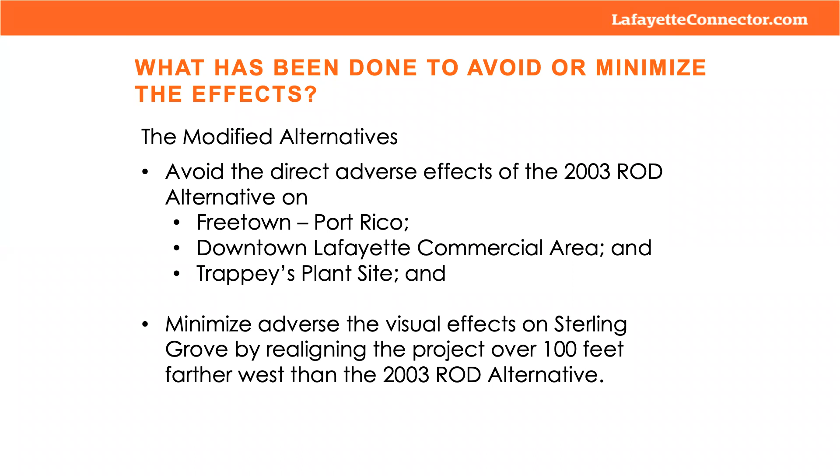We end up in one of two places. Either we have an adverse effect, which is not the end of the world—it doesn't mean it's a fatal flaw, it just means there's an adverse effect. There's lots of trade-offs whenever you're going to do a one billion dollar improvement to a community. And if we go there, then we just deal with it.

We develop minimization and mitigation tactics. Or we end up with a finding of no adverse effect, which doesn't mean there's no effect of the entire project—that just means there's no adverse effect of the project specifically on historic properties. You all know how this works.

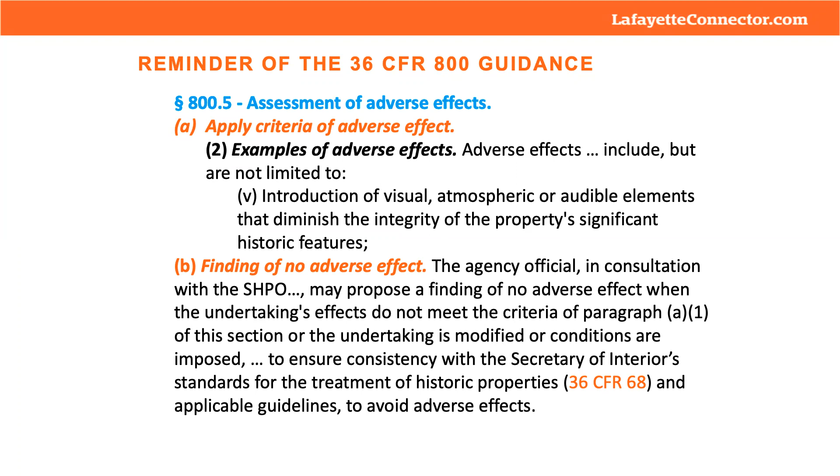And then if there is an effect, we capture that. We come to agreement among ourselves about what the mitigation is going to be, and that's agreed to in an MOA, which is then a binding legal agreement that is essentially part of the record of decision and the federal approval of the project.

So you'll recall there's essentially two designs, which are almost the exact same design—one using roundabouts and one using signals for the central throughway corridor. There are some differences in the extent to which roads connect; you can see some of these connecting roads, second, third, for example, are a little bit longer in one than the other.

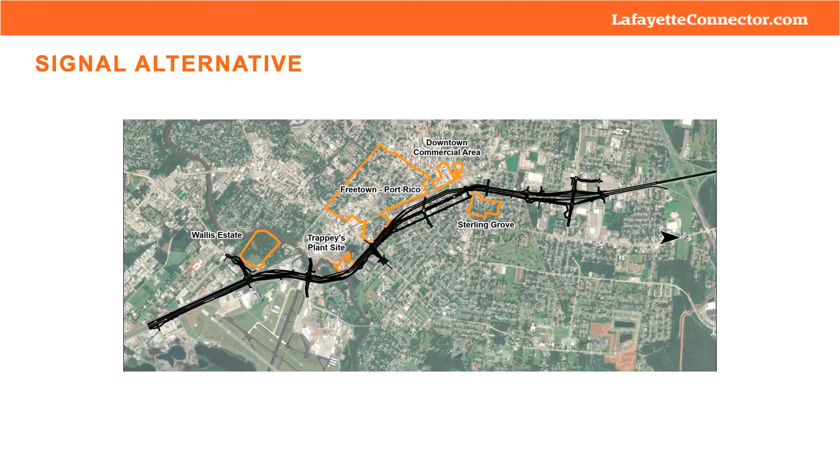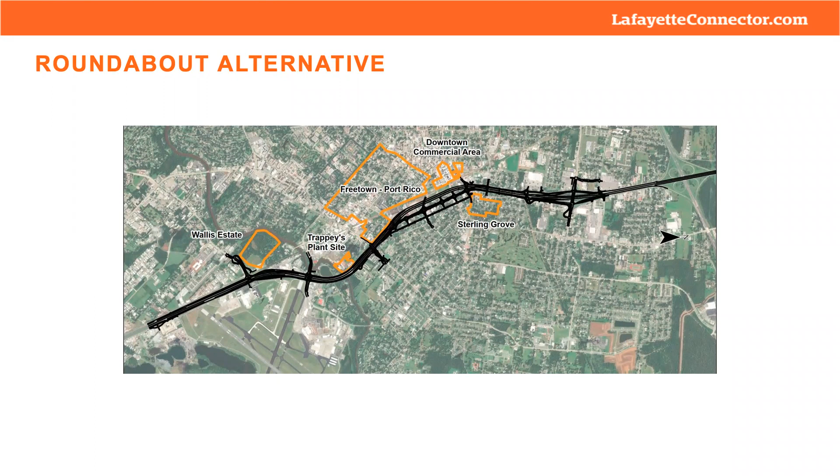But those improvements are mostly just restriping to make sure that, for example, while we connect to a slightly different road, the stripes are all aligned, and maybe some pavement improvement, but a lot of that within the road itself.

So we're now going to walk through that corridor, north to south, and look at some of those areas we've been thinking about. You'll recall this map from last time—it's showing the roundabout alternative and Sterling Grove.

I will not belabor this legend over and over again, but I'll hit it on this first one. So the purple and the peach, maybe beige-peach color, those are both the edges of the Sterling Grove Historic District. One is the edge from the nomination and the approved district, and the purple edge is what it could be, because we think those are related and contributing historic resources. But regardless, the red line is where the right-of-way used to be.

And after a good bit of work, we managed to move it over to where the yellow line is now, about 100 feet away from where it used to be, and much further away from the Sterling Grove Historic District. So we are no longer acquiring any property from the Historic District.

We're no longer putting a major roadway right in front of St. Genevieve's. We are still doing some slight improvements to Simcoe, but those would be within Simcoe itself—essentially striping and signage to make sure it aligns, but we're not going to be rebuilding around Simcoe. This is the roundabout alternative.

Remember, there were two alternatives. The signal alternative does not require that little improvement to Simcoe, so it is clearly, unarguably nowhere within the district boundaries, not even getting too close to them. So we've clearly managed to get out of it. And with the roundabout alternative, you do see some overlap.

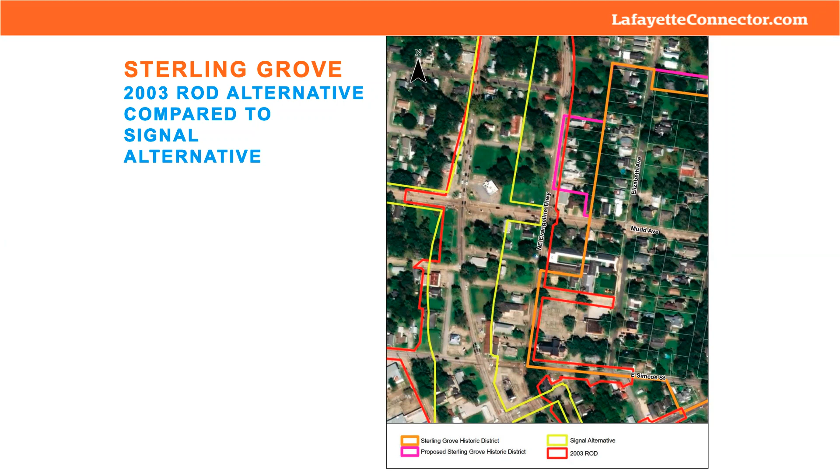And for that matter, if you're a technician, a neighborhood rep, or an advocate, and you think you see an effect here, help the rest of us understand what that effect might be in your mind, because that's what we'd like to hear.

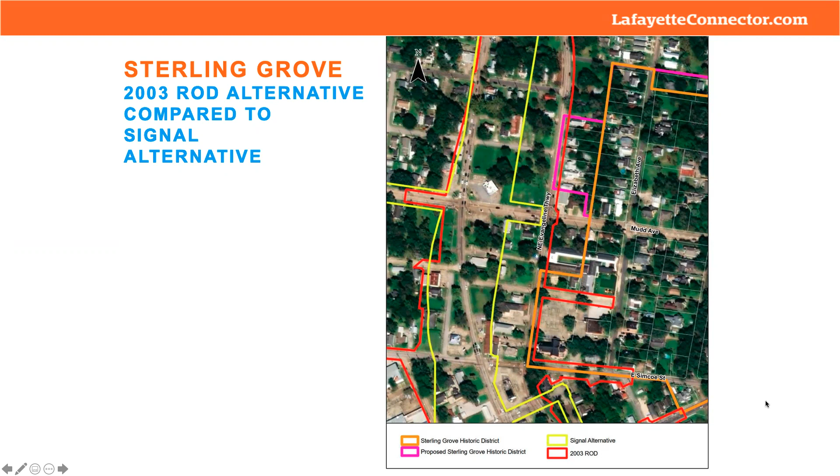Thank you, Sarah. I'm going to move on. We can come back to that. And like I said, we might be able to pull up the road line work and dive into that conversation if you want to revisit it, Brett.

Now we're moving further south, adjacent to the downtown Lafayette Historic Commercial Area. This was when we had the historians in the field identifying potentially eligible properties. They identified a potentially eligible downtown district at the time. Since that time, representatives of the area and local government have advanced a nomination and had it listed on the National Register.

The edges of it are pretty similar to what we had thought when the technicians were out in the field looking about. And regardless, it's a good bit away from the right of way. So you can see the railroad property is in between. The district does include Rosa Parks, the train station, but then there's a good bit of open land, former railroad yard, and some other intervening properties before you'd even get over to the elevated interstate. So a good bit of distance there.

And in a part of it that isn't exactly looking in that direction, right? So it's near to downtown, but it's removed in a couple of different ways. Physically very much removed. And then the way that downtown orients itself back towards its core to some extent, and away from the corridor.

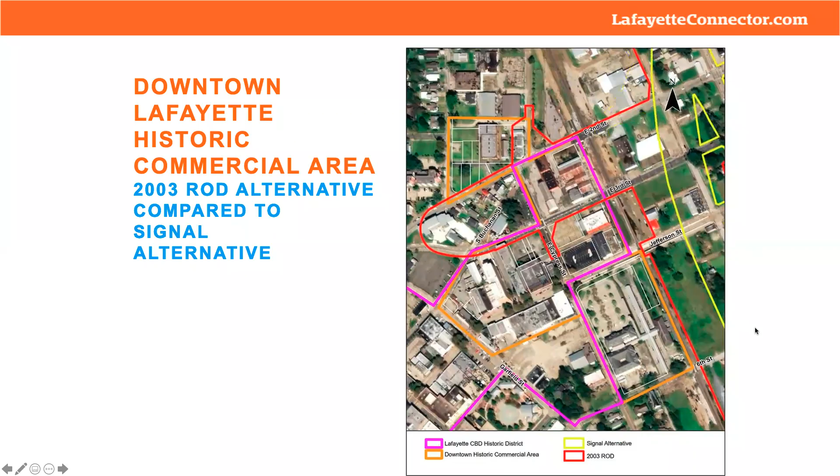A bit further away, so we didn't do renderings of that, but there are lots of renderings coming online. There's a number of them in the virtual reality room. The virtual reality room, which is i49vr.com, has the same materials that you see in the room around me here. So all these boards you can download, and you can actually look at the roadmap and download the roadmap. So if you want to send a snippet of it to a neighbor and say, hey, is this what you thought? What do you think of this? We're happy to know that would be happening. That's partly why we made that VR room available.

All right, moving down to Freetown – Port Rico, which is another district that's on the National Register, not just eligible. You can see that the record of decision design, the former design, was acquiring a good bit of property, hitting some single family structures, definitely permeating the district and arguably maybe even separating it, right? This part of the district and this part would not have been so integral if this had occurred. But a lot of folks said, no, don't build that way, tuck it in a lot tighter. And so we have done so.

This is essentially the edge of the interstate work, which is actually a 25-foot buffer off of the expressway. So the expressway is not even on the yellow line, it's another 25 feet off. And this is merely the rework of that portion of the road, which does get nearer to the district but even itself doesn't protrude into the district at this point. So a good distance here, not something that I would think would likely be considered an effect, but if you all are thinking about things differently than I am, please interject about the effect you'd see or don't see here.

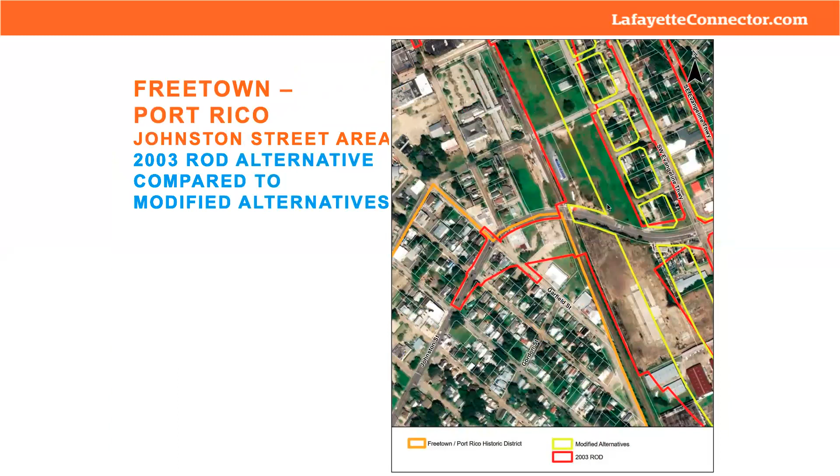Yeah, well I was just gonna say, you know, that area right there hasn't been very attractive for a long time anyway, but I realize some of the people that live along there might have—you know, it's gonna be different from what I can see. But I think there's like some retail or some businesses along there from what I recall. I'd have to drive down there and see. Okay, that's good. Thank you. Thank you.

Is there anybody we haven't heard from yet? Anybody from Freetown – Port Rico that would like to speak to these changing conditions and what their thoughts are?

I think just to be clear, these renderings were made before we had the control of access map. And we now know that in addition to what you see, there would be a chain link fence going on. Just so we're not hiding anything, we'll disclose what we know. Lou's pointing out that the control of access is a serious thing. It's partly why the expressways work so well. And the control of access could lead to a line of fence down here.

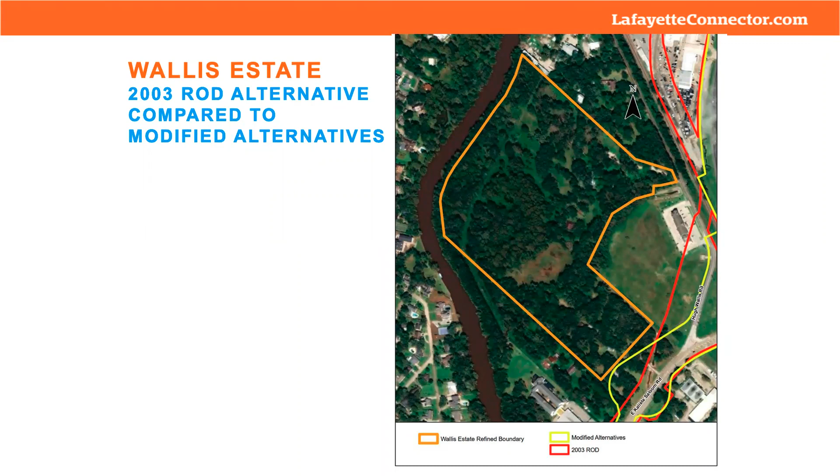And that was the end of the figures, unless you want me to loop back through and revisit anything. We've got to figure out what this body is thinking about the Freetown district concerns. We'd like to wrap up this phase of the work and get to a clear determination of effect with FHWA. We'd like that to be informed by a good rousing conversation among y'all, and then keep the process moving.

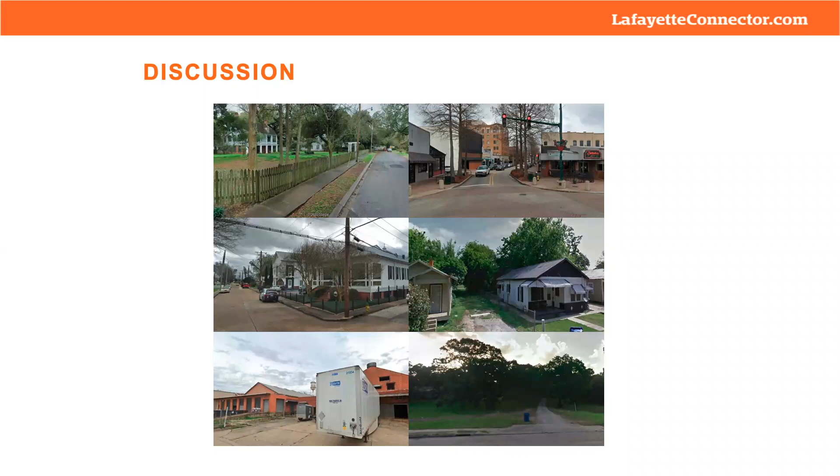I think we looked at those Freetown exhibits for a good bit of time. I can go back to them if it helps, but

Has anybody who joined the call a little late like to chime in, or someone who's just been quiet? There's 10 people there, I've only heard from half of them. Doesn't look like we have any new participants, everybody's still here. But if you have any questions or comments, even if it's just yes I like this, or no I don't, we're interested in hearing it, so please feel free to chime in.

These three meetings, the one last week and the one or two this week, all we wanted to do was come to some modicum of agreement on what the issues and concerns were, to help us document whether there's an effect or not.

So, are there key inputs that we're missing? There's not really any more data that we have on our side to show. I think we've gotten some good representation at this meeting. Maybe there's some key individuals we'd like to still hear from, but Brett says, I will. Brett, I'm not sure what you will. You want to clarify?

Yeah, I guess my comment would be, it looks like you guys have gone overboard trying to mitigate as many of the problems as we've run across the past couple of years. And I'm impressed with the way you've juggled things around, especially in the Sterling Grove area.

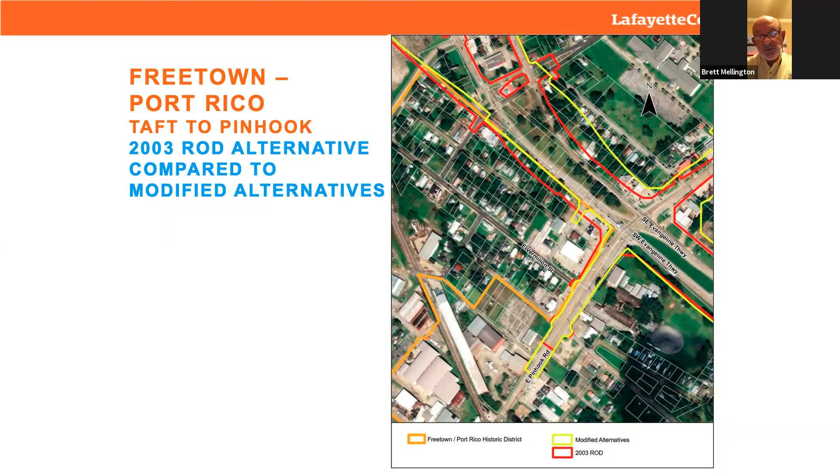Well, I mean, it is what it is. You guys have juggled and moved it and mitigated as much as you possibly can from what I see. So I'm pleased with that. Thank you for that. Anybody else?

I think I saw a couple of new chats come in, so maybe someone else is joining the conversation. No.

So if we're running aground a bit here on more things to talk about and say, I'm starting to think we shouldn't have the meeting tomorrow. Otherwise, we just restart the same sort of half awkward silence we're in right now at 5:30 tomorrow. And I'm not so sure there'd be anything real fresh.

Now, if one of you tells me that you really want to go look at some things, check on these other districts, and talk to some neighbors, and tomorrow night we have to have the meeting, then I'm going to be here for it. But otherwise, I think that these two sessions, we've really gotten the input that we're going to get regarding the effects, so that we can bring forward some recommendations to FHWA and move forward with this phase of the work.

Sounds good to me. What do y'all think, we covered it? I think you did. All right then. Yes, so we'll be canceling tomorrow's meeting.